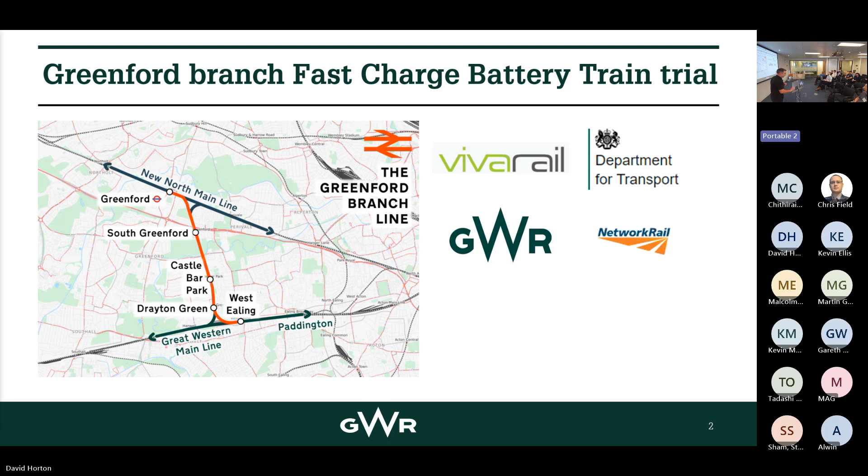The key ingredients to this whole trial are really the people, the train, and the charging system. I'm going to start with the people, because that really is the most important thing about the whole trial.

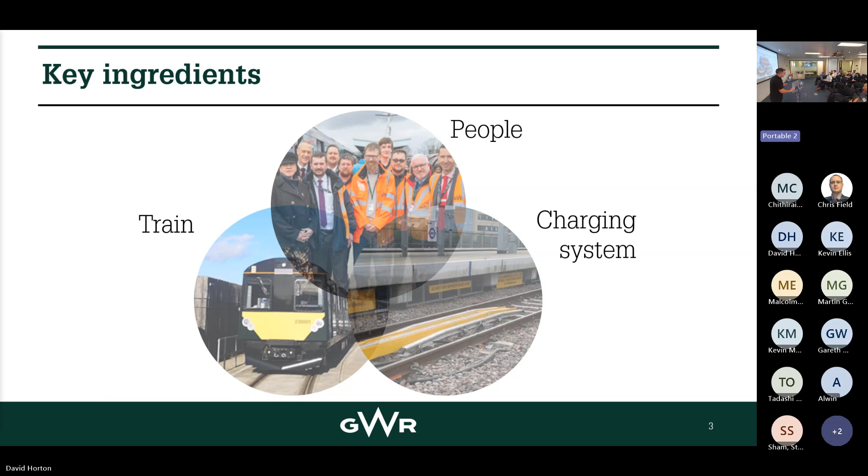I always like to start these presentations with a nod to this gentleman, Adrian Shooter, who sadly passed away around the same time Viva Rail went into administration, December 2022. Adrian is well remembered as one of the leading figures of privatisation. He took on Chiltern Railways, or the part of British Rail which became Chiltern Railways, and totally transformed it with route modernisation, new trains, new signalling, higher line speed, line reopenings, and double tracking where there was previously single tracking.

As engineers, have a good read of those two books there, because they're fascinating and inspiring. One is Adrian's biography, and the other is specifically about Chiltern Railways.

Anyway, Adrian retired from all that, but didn't retire for very long, and decided that he wanted to do something a bit different. At the time, there was a gap in the market for diesel trains, and he saw an opportunity which no one else did, which was to take old underground trains and repurpose them as diesel electric multiple units.

So the train you see there, standing just behind Adrian, is one of the old District Line D78 trains, which have now been replaced by the S-Stock. They were otherwise going for scrap, but they weren't too bad actually. They were aluminium bodied, had an interior refresh about 5 or 6 years previously, and new bogies about 15 years before that. So actually, they weren't really ready for the scrapyard. It's just they happened to be going that way because LUL wanted to standardise rolling stock.

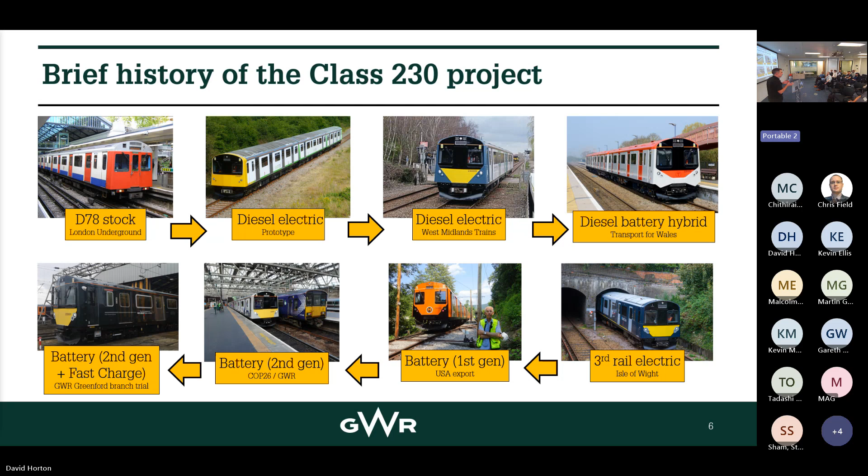And then finally, we took the original 230001 diesel unit and turned it into a battery train. We took it to the COP26 climate change conference in November 2021, and ran it as a demonstrator for 2 weeks in and out of Glasgow Central, carrying invited guests. And then finally, that's the train that became the fast charge unit that we have today.

Just to say a little bit about what's gone on in the last few years. Viva went bust, and we had to get rid of a lot of stuff. It's not just been about this trial - we had an awful lot of assets to get rid of.

We had a factory to clear out, so me and my little team weren't just doing the trial, we were also clearing out the factory at the same time. Many dusty hours of sorting, and unfortunately an awful lot went in the skip. But that's almost a separate story.

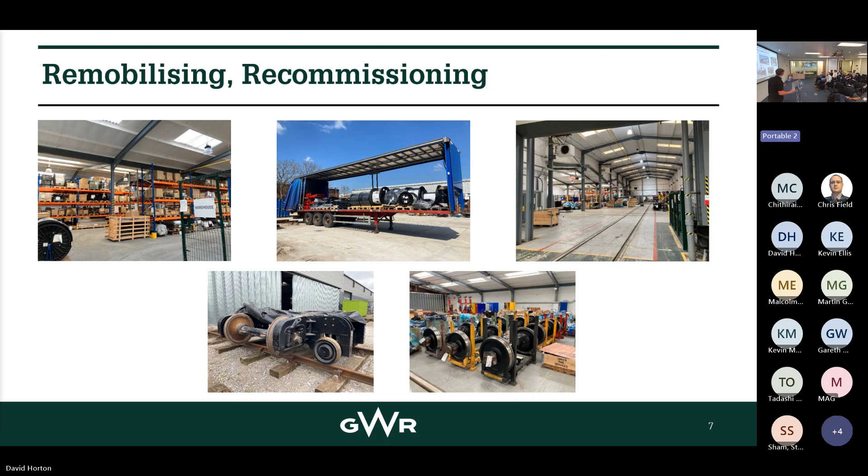That all started in February 2023. Great Western took us on, and we remobilised the team, got ourselves a new office in Leamington Spa, and got rid of the factory stuff. By about June that was clear, so we could then focus on the train.

Here's the train. We had to find somewhere to actually recommission it, because it had been stood for about 5 or 6 months whilst the administration was going on. It was at Bletchley Depot when that happened, and West Midlands Trains were redeveloping that depot, so they wanted us out. So we had to find a new home to recommission the train.

Slightly ironically, we ended up back at Long Marston, which is where Viva Rail started in the first place, by which point Porterbrook had purchased Long Marston and the horrible old shed there. It was a rough old facility when Viva Rail were there, but Porterbrook have invested about £10 million in it now, and it looks absolutely wonderful - it's got three roads of pits, proper lighting, proper everything.

So we were able to take the train back there and recommission it. We recommissioned every system because we didn't want to take a chance - we didn't want to assume it was still okay. We wanted to recommission everything, so we did that.

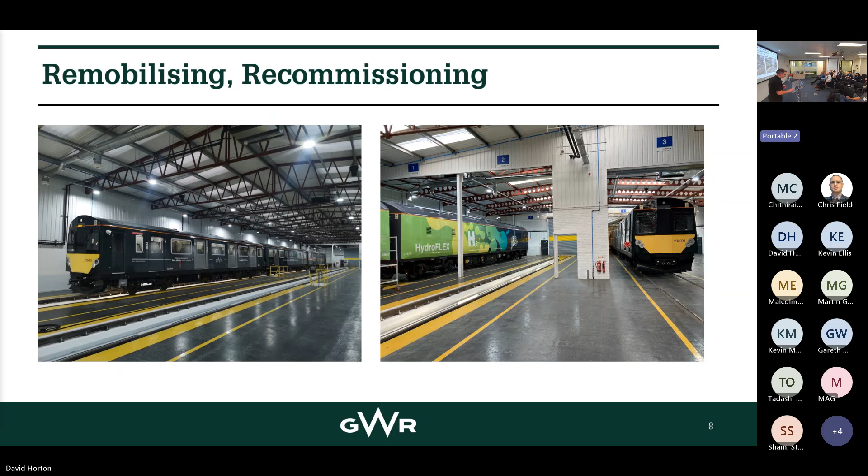So we had to basically gut it and start again in order to turn it back into battery units. We totally rewired it, rebuilt the cab, refitted it, and in amongst that we had to make some changes. Obviously, to make it into a battery train, we took some of the architecture that was there before in its diesel form, but had to change certain things.

One of the challenges Adrian gave us was, I don't want just 2 of these things, I want 3 batteries. He wanted to absolutely stuff the underframe full of batteries. So we had to find space for the 3rd battery, which meant rearranging some of the other furniture - we had to relocate the main reservoir, and I don't know what else at the time, but we only just managed to fit it in, as you can see.

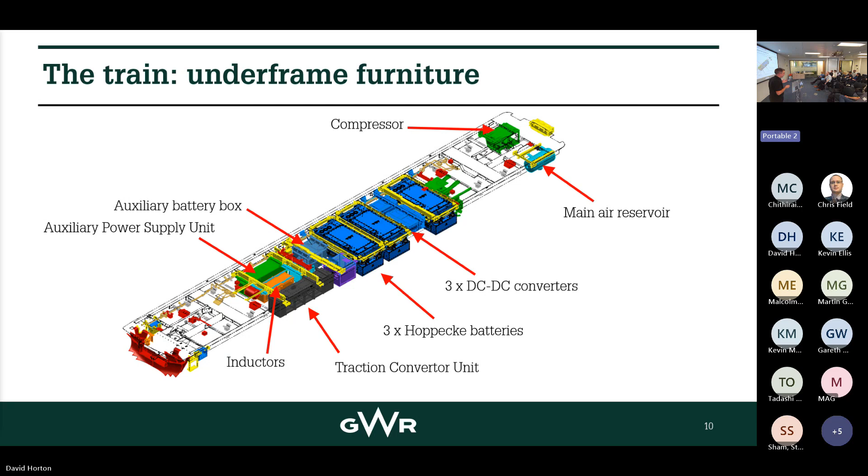So we designed all of that, and amongst not just the moving of the big lumps of furniture, there's an awful lot of finding space for the cables when you're doing batteries and charging. You're talking about pretty thick cables, so actually finding a home for them and finding a route for them was also a bit of a challenge.

This is the diagram of where the cables go. Imagine that's the plan view of the underframe. You've got 3 distinctive yellow rectangles representing the batteries, and the purple lines are where all the cables go. You take power from the batteries to the traction convertor unit, which is the brains of the train, and cables from the pickup shoes for the fast charge system to the battery. In the end, we had to cut some of the floor out, put the cables underneath, and lay the floor back on top, so the floor actually supports the cables, as well as being a fire barrier and a floor. It performs 3 functions, and you can see some of the cross section of that below if you like this sort of detail.

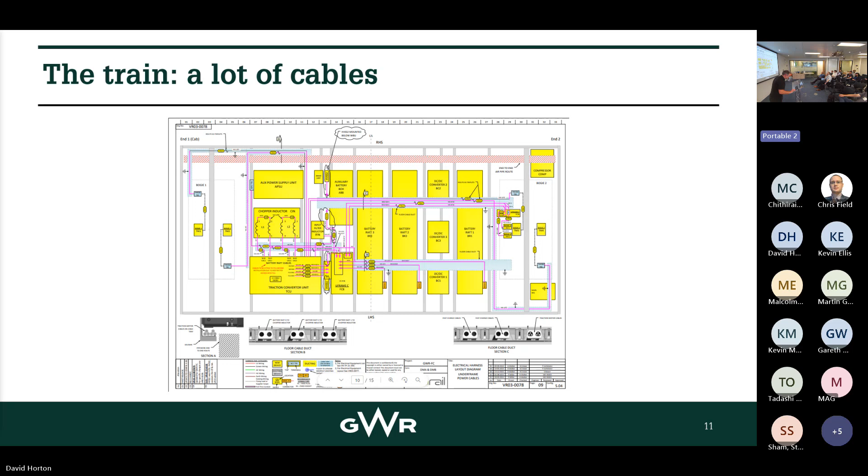What we ended up with in terms of mass is a 96-ton train, which is about 8 tons more than the equivalent diesel units. So yeah, battery trains are heavier, not surprising there. And you've got a capacity of about 37 tons of passengers, which leads to 133 tons if you really crush loaded it, which on the Greenford branch you're not going to do, but that's the plated weight of the train.

We've also fitted - the old LUL trains used to have a door between the carriages. Now they've got a little gangway. It's not a wide gangway like you see on the Elizabeth line, but it's a walk-through gangway, so that's a nice feature. It's also got draft screens, and it could have luggage racks if you want them as well. So there's all kinds of stuff.

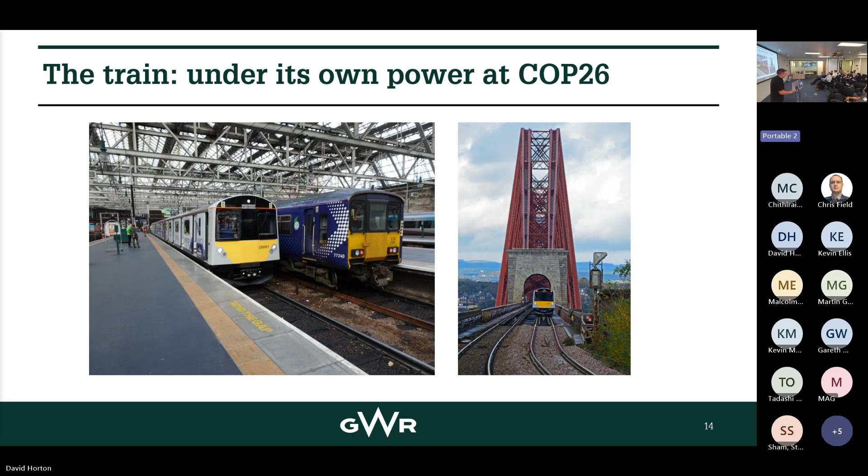So that was fun. So onto the fast charge system, which is what you've all come to hear about. Obviously with the battery train, the problem is your range is limited. The average diesel train will go 1,000 miles between refueling, and you just can't do that with a battery train. So you have to find a way of charging it. There's no way you're going to get a driver to get out and plug it in for 20 minutes - that's not going to happen, not practical in a railway environment. And there's no way you're going to change the batteries either with some sort of mechanical handling, as someone suggested to me once. Not 1.7 tons, no.

So the system that was devised - and I don't actually know who in Vivarail invented it, the opinion is out, it wasn't Adrian, it was one of the other electrical engineers, there's a bit of historical competition about who was actually the inventor of the system - but what we've ended up with is a system that automatically charges the train. All the driver has to do is stop it in the right place. And we're not talking millimeter tolerance, we're talking about half meter tolerance, average stopping tolerance at a station.

And the way it works is like this. The kind of power you need to charge the batteries is quite enormous, and you can't just connect to the national grid, because there just isn't the capacity to do that. So you have to have an energy buffer between the train and the national grid, and that's where what we call the fast charge battery bank comes in.

The big thing you see in the middle is essentially a 20-foot shipping container, which has got some batteries in it and some power electronics, and it trickle charges from the grid when there's no train around. When the train comes in, it connects with the battery bank via some rails in the four-foot, which I'll show you in a minute.

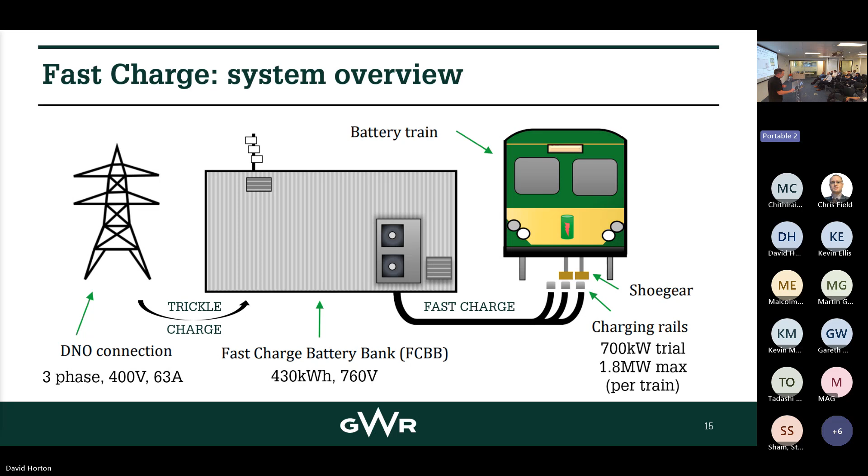So that's the basics of the system. Here's a little graphic of what it actually looks like, step by step. In the four-foot, you have the charging rails, and you've also got some RFID tags, which are RFID beacons. If you're familiar with ETCS and that system for signaling, it's exactly the same beacons, just programmed with a different code. So they're off-the-shelf beacon technology, and you have 3 of those beacons.

One is what we call the station confirmation beacon. Hopefully this will work if I press - a little train will come along. There it comes. So the first beacon says station coming up, and that's what arms the system. The second beacon tells the train to lower the charging shoes. And then once the train has stopped, the third beacon says, I'm in the right place, and charging commences.

Now, there's also another layer of interlocking. There's actually some proximity sensors which pick up on the bogie frame once it stops in the right place, so it doesn't just rely on those beacons. It's got Wi-Fi communication between the train and the battery banks, and it's also got proximity sensors as a final check to make sure it's in the right place. What this means is, if any of those things don't pick up properly, then charging just doesn't happen.

So, as we're now finding - well, no, that's probably unfair - it is actually proving to be quite a reliable system, but it is a little bit sensitive to comms dropping out, or a proximity sensor being knocked over or something like that. But I suppose that's the way it should be, because we wanted to make sure that we don't try and charge the wrong train at the wrong time.

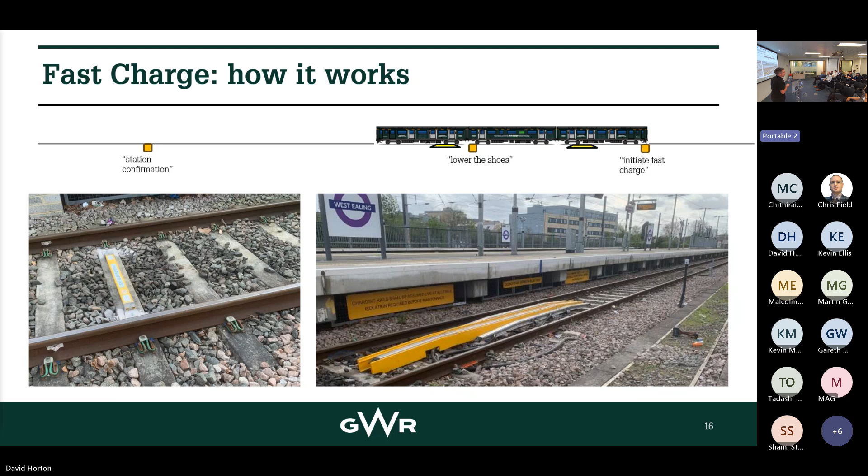You would end up with the negative shoe going from one side to the other, if you think about the geometry of it. At West Ealing, you've got 2 sets of rails and 2 fast charge battery banks, each one serving a driving motor car. So you've got 2 driving motor cars, 2 sets of charge rails, and 2 fast charge battery banks, which gives redundancy. Actually today we were charging the train with only one end working because we've got a problem with the fast charge battery bank. But that's great because it means you can still carry on — you just don't charge as fast, but you can still do a full day of service on that basis.

Right, I'm going to try and talk about power flows now, even though I'm a mechanical engineer, not electrical, but I'll give it my best shot. This diagram explains the elements of the entire system in block form.

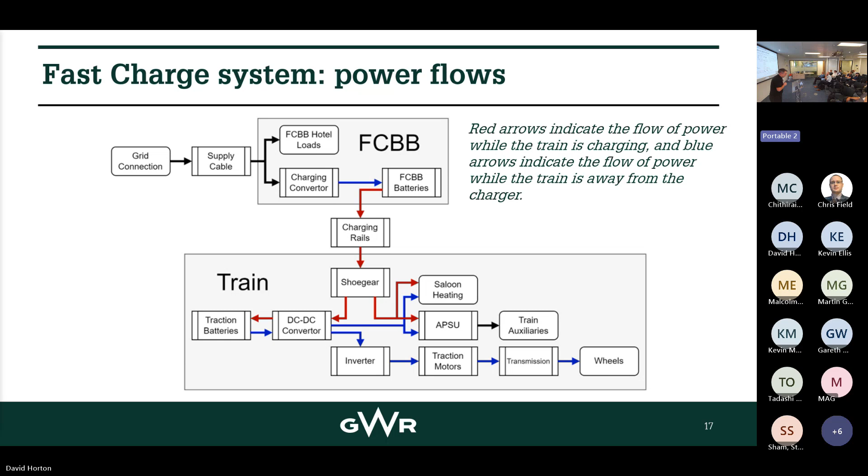So you have the grid connection via a cable going into the fast charge battery bank, FCBB. The FCBB has its own hotel load, so it's got its own air conditioning unit to keep the batteries at a stable temperature. The main power flow is into the batteries themselves in the fast charge battery bank. Then you've got cable coming out of the fast charge battery bank going to the charge rails in the four-foot, and then you've got everything on the train. The train has got the shoe gear, which feeds directly into the traction batteries and also into the auxiliary power supply unit, and it also feeds the saloon heating as well. I won't go into too much more of this, but it's sort of standard power architecture for a modern train, really.

Now the batteries, which is what everyone's always interested in. For a long time we were telling people, oh yes, it's lithium iron phosphate batteries, and not long ago someone said, well, how does that compare to lithium titanate? And we said, well, I don't really know. They've all got pros and cons, and what you typically find when you look into it is what you're trying to consider is 6 things: specific energy and specific power, i.e. how much energy and power you can get per unit mass in your battery, but also how safe the chemistry is, how it performs — so that might be how fast you can charge or discharge it, how long it's going to last, its lifespan, and how much it costs.

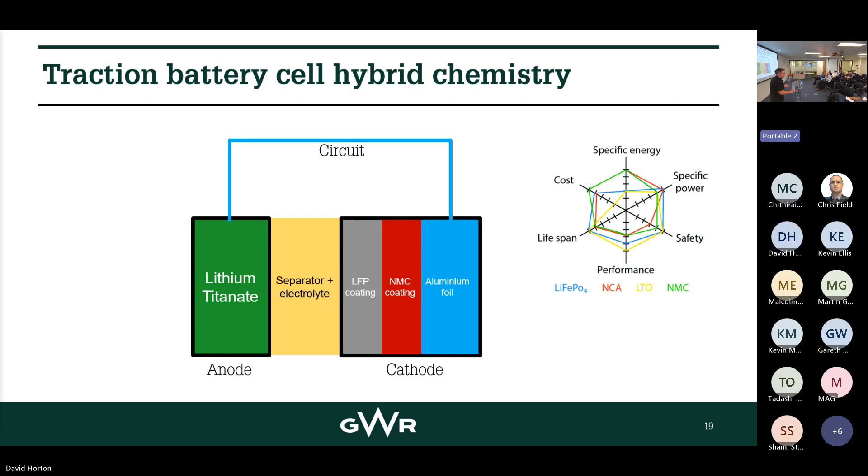To us, it's kind of just been a black box up until now. You buy the battery, you know how to treat it, you homologate it, but actually the detail of what's going on inside, we hadn't really got into. But that was an interesting finding. So now we know a bit more about our battery chemistry. Suffice to say, lithium phosphate and lithium titanate are supposed to be some of the safest battery chemistries out there, which is why they've ended up being used on trains and in EVs.

These are very actively managed batteries, as opposed to the average e-scooter, which doesn't have any of this. Each battery raft has its own little HVAC unit to keep the temperature in check. You monitor individual cell voltages, individual cell temperatures, and the balance of the cell voltages. Each battery has its own battery management system, and that all feeds back to the main train computer, the TCU.

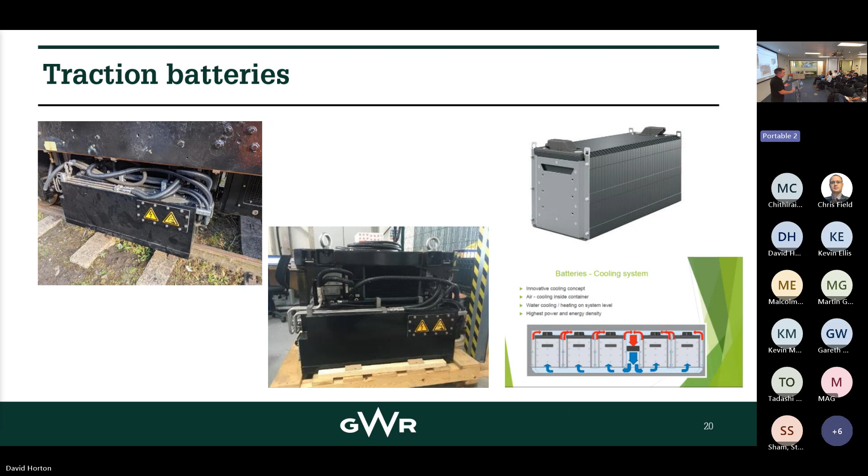It all forms part of the safety case as well. With lithium-ion or lithium titanate batteries, there's no real chance of putting out thermal runaway if you get it. So you put all your efforts into stopping it happening in the first place.

There are basically seven things that can lead to thermal runaway of batteries, illustrated on the left of the image here, and these are the things you're trying to prevent: external heating, being close to someone else's fire, overcharging, over discharging, charging at too high a current, structural damage - someone could crush it, or it could be a bullet penetrating it, which is tested for separately - and finally short circuits. All the efforts go into stopping that from happening in the first place.

That can either be through the battery management system or through actual mechanical design. These have got a pretty heavy-duty frame around them, so if they did fall off the train and hit the track, they'd be pretty resistant and wouldn't get very damaged, I'd have thought. They've got internal firewalls, and if all of that fails, you've then got downstream mitigations against the effects of thermal runaway, like treating the fumes that arise. It's actually got a fume box in it with some clever chemicals supposed to take away the worst of any fumes that might arise.

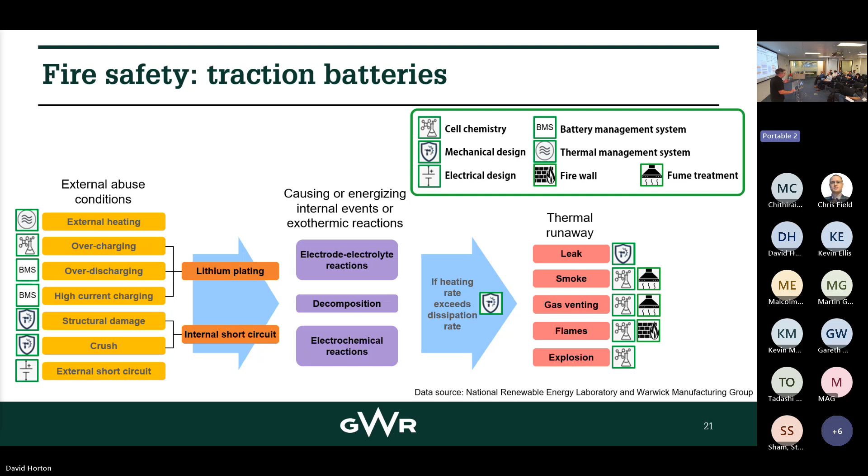As you can imagine, it took quite a while to convince the safety authorities to put this on a train. VivaRail weren't the first to put lithium-ion batteries on a train - I think that went back to about 2013 when Bombardier converted a Class 379 and put some batteries on it. But we were, I think, probably the first company to put this amount of batteries on one train. So every step along the way involved very careful scrutiny of all the changes we made.

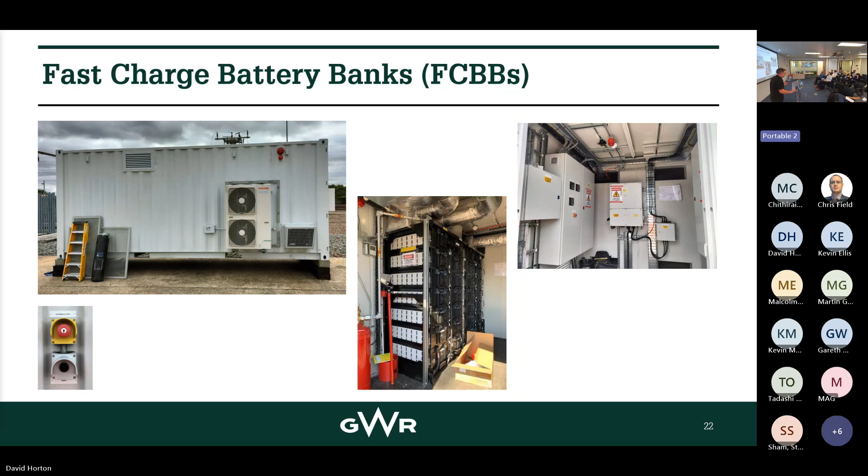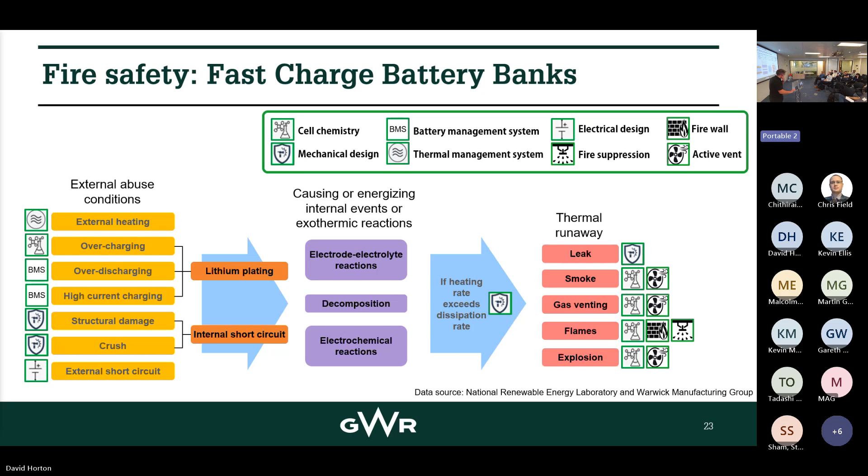It's a similar story for the fast charge battery banks, although you could argue the risk isn't so severe for these because they sit trackside, and if they did catch fire it wouldn't affect as many people as it would on a train. But again, they have very active management of the batteries, and in addition, they actually have their own fire suppression system in the containers. So as you can see, we've done just about everything possible to prevent anything bad happening.

Anyway, back to the more fun stuff. This is the development of the shoe gear, and this had never really been done before. Obviously there is shoe gear on trains, and we were very conscious of certain things when it comes to designing shoe gear.

The first thing is, if you're designing shoe gear for a train, normally it's mounted to a bogie, which is a horrible vibration environment. I've got some personal experience of that, because I was a bogie engineer at Bombardier for a while, and there were terrible problems designing shoe gear because of the vibration environment. So what I decided was our shoe gear would be mounted on the body, so it was in what they call the secondary sprung environment - the same vibration environment the passengers feel, which is two stages separated from the track, with primary suspension and secondary suspension.

That also means the design of the shoe gear is adaptable for other types of rolling stock. It's much easier to mount it onto another car body than it would be if it was a bogie-specific design, if you see what I mean.

The only thing you have to watch with that is the movement of the shoe gear on curves. If you've got overthrow, when the carriage goes around a curve, and you put the shoe gear in the middle of the car, you get the worst overthrow, and you might end up with the shoes not on the rails. So we put the shoe gear near the bogie pivot centres so that it suffers less of that.

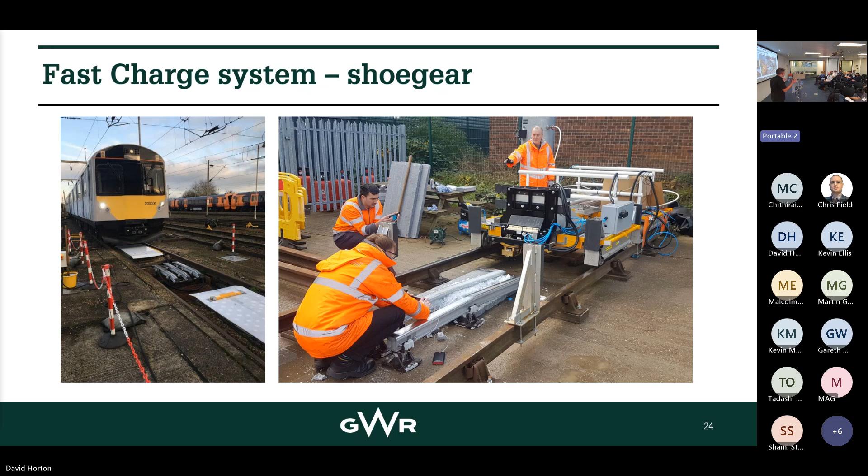One of the big considerations is what happens if you get ice on the rails, or leaves, or oil on the rails. So one day we actually created ice using ice from the supermarket — I think we used nitrogen or something, super cooled it, and packed it around the rails. Then it snowed the night before, so that's where this video comes from.

So you can see, hopefully this will start in a minute — here come the shoes, they come down, run up the rails, pushing the snow out of the way. To be fair, that is nice soft snow. Then it retracts, and it did that for 20,000 cycles, which represented a year of usage.

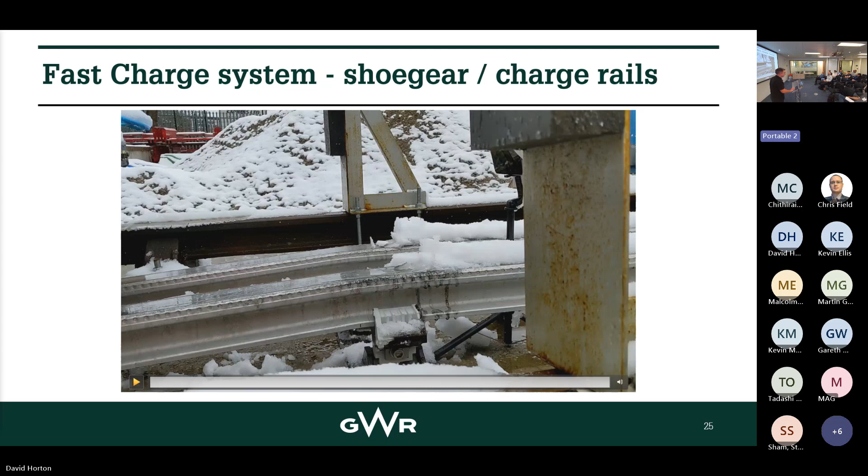But obviously now with the real train in situ at West Ealing, we're testing the real thing. And strangely enough, the other day we noticed the diesel train was putting oil all over the rails, dripping oil all over the rails, and it didn't have any effect on the charging whatsoever, which was nice.

This is a video of it when we were at Bletchley Depot. What you see is some short charge rails. Those aren't representative of the full length of the real thing. What I'm going to show you is the trackside view of what happens.

The white sheet there was just to protect the shoes, because in this particular location we had some concrete, and if the shoes had hit the concrete, they would have damaged themselves. So we had this skid pan arrangement to protect the shoes as they came down. But at West Ealing, you've just got ballast instead of concrete in the middle, so the shoes don't come into contact with anything.

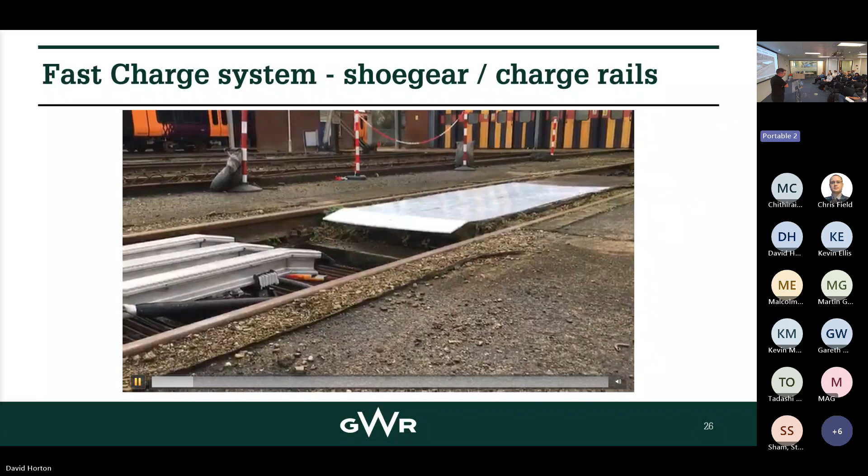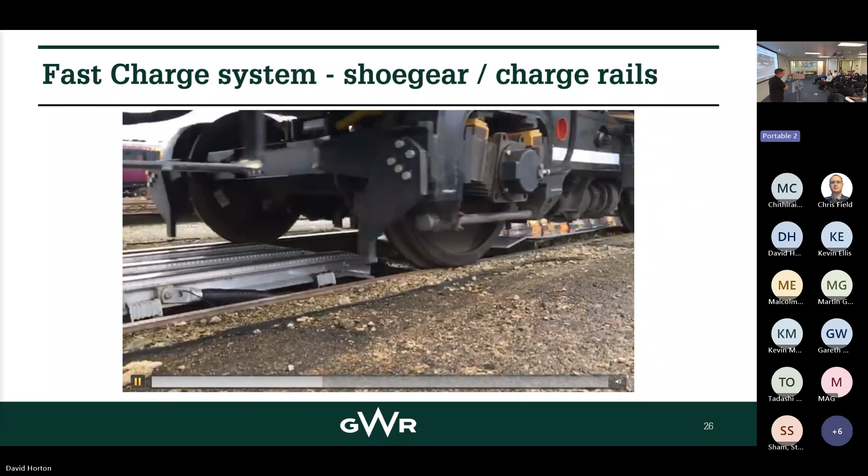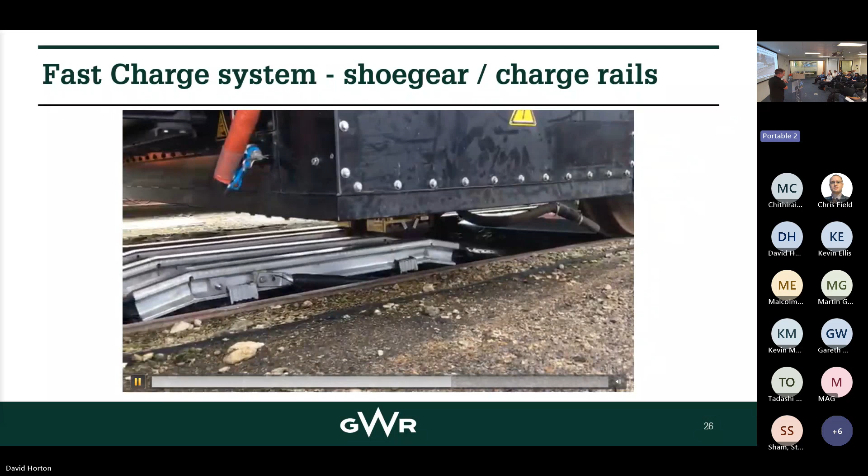I'll just play this video - it's not that exciting, but the train comes along. Obviously the driver has to slow down to a reasonably slow speed for all this to happen. So the first leading bogie passes over. We kept the shoe gear away from the leading bogie because that's where all the antennas are, so we wanted to separate them. There they go - you just see them come down, like Wallace and Gromit, then up the rails, and then it stops. That's all you see.

It's quite unexciting really. Once the charging is finished, as soon as the driver puts the power brake controller into power step 1, the shoes automatically retract within about half a second, the brakes come off, and off you go. So all the driver has to do is stop it in the right place, put it into neutral, make sure the brakes are on, and it all happens automatically.

The only indication the driver gets that anything's happening is a single yellow light in the cab, which indicates that charging is happening. You can also see charging is happening if you step out of the train and look at the body side indicators - they flash white, which again indicates charging is happening.

We were quite deliberate about not telling the driver what the state of charge was, because at the moment the driver doesn't know how much diesel they've got, so why should they know how much battery? The problem with telling them how much battery they've got is they start to worry about it, and then you get 'I can't go, I can't do the trip, I'll have to take the train out of service.' So there's a bit of debate about what information to give - obviously we monitor the state of charge remotely, there's a remote monitoring system with alarms if it gets too low. But the driver, we don't tell them very much, rightly or wrongly.

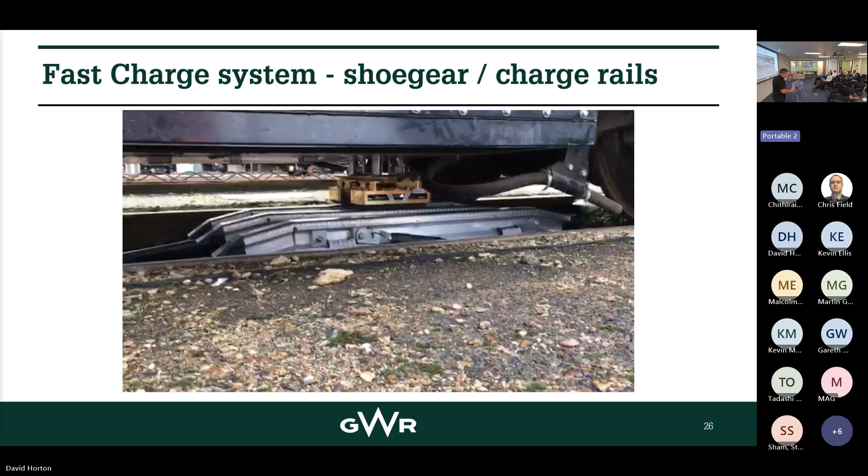But actually that's gone down all right with most drivers, so I've shown you that.

I probably won't say much about this. I'm not going to go into detail, but suffice to say, the approval of all this was hard work for all the right reasons, because we are dealing with high voltage and batteries and a new system. Fundamentally we were working under the common safety method, and the first step is to define the change - put a boundary around what you're actually changing in the railway environment, and then decide whether it's a significant change or not. Because this was the first time this charging system had ever been used in the railway, it was deemed to be significant change, which brings in the need for a third-party assessment body.

Some of this, in light green, is all the stuff we had to do for the assessment body. So you have a big hazard identification session - we had several of them - and then you have a safety justification report, hazard record, and a load of safety requirements that come out of that. You then have to close out the safety requirements either through design or other mitigations.

Once you've done all of that, you get your safety justification report, you give it to the assessment body, ASBO, and they assess it, ask lots of questions. You then go back, answer questions, make design changes, whatever it is.

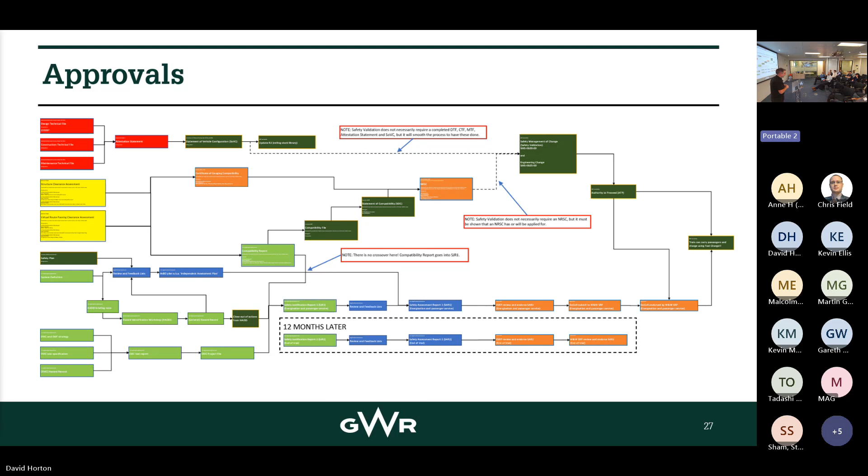But we got it approved, and it's now essentially usable in an unrestricted fashion. It was several stages towards that, and Network Rail have been involved all the way through. So it was very much a partnership, and we denigrate them, but actually they've been pretty good. But it has been a bit of a tough journey.

Back to more interesting things.

The other question I talked about earlier, battery trains have only got a finite range. So we've got our charging system, but then you have to consider, well, how far will it actually go? Not just under normal conditions where everything's working fine, but under perturbed scenarios where, for example, one of the two trackside battery banks has stopped working, or maybe a couple of batteries on the train are no longer responding or something like that. So you have to consider the effect of that.

Now, we were lucky to have an undergraduate come to work for us in VivaRail days for a year-long placement. He was given the task of developing a model of how this system works. Being young and bright, he took it on and came up with this wonderful model in Python, a coding language which I don't understand. But anyway, he ran with that, and then he went back to university, and we got another one called Jonathan, and he refined the model, improved it, expanded it, all the rest of it.

So we now have this wonderful model which we call the Battery Train Network Simulator, BTNS. You can almost, if you can imagine it, click and drag various elements into it. So you've got a traction motor with its characteristics, you click that into the model. You've got a battery with some characteristics, you click that in, and you gradually build up the overall model with all these little elements. Of course, the characteristics of each element is based on data sheets or real-life testing or whatever it is. So you can build up this model of the train, which is what these blocks represent here.

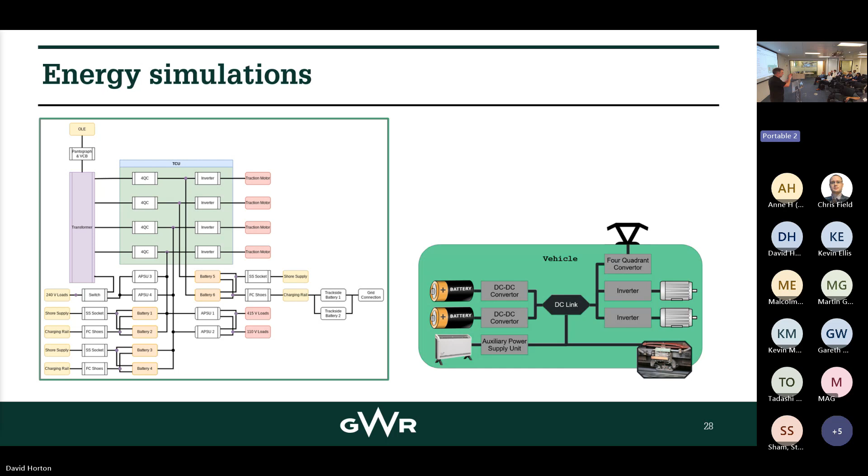But you can also build up a model, equally as importantly, of the route that you're running the train on. So you need to know things like gradients, number of stations, speed limits, driving styles, and all of that. All of that has an effect on the overall energy consumption of the train.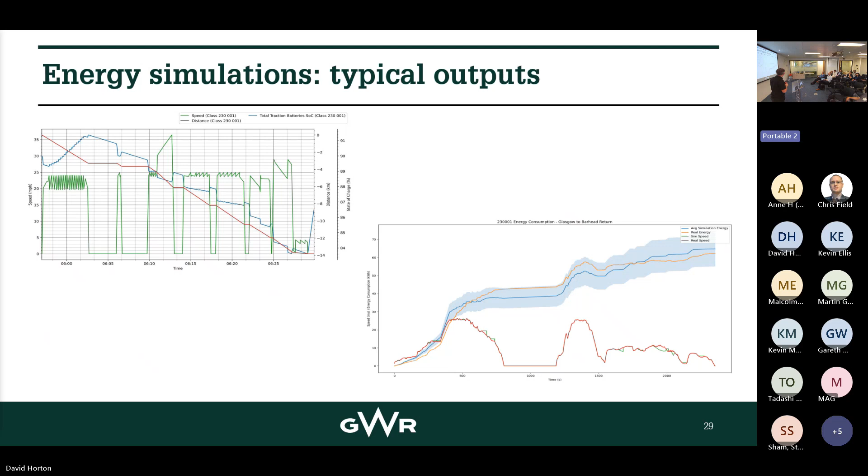This is actually a real plot of what the batteries do. At the moment we're running the train on the Greenford branch Tuesdays, Wednesdays, Thursdays, just to give us enough time to set that up for the week and then analyse the data at the end of the week.

Unfortunately, we can't run the train like the normal diesel train, which does 31 round trips a day, 6 days a week, because there's not enough paths on the line to do that while the diesel train is there. So if we want to do a full 31 round trips a day, we have to do it on a Sunday. We did that for the first time in June, Sunday 30th of June, and that's what the graph looked like of battery state of charge.

The sawtooth represents, when it goes down, that's energy being used when running between West Ealing and Greenford and back, and when it goes up again, that's where it's being charged. You can see it's a pretty uniform profile all the way through the day, except around 6 o'clock in the evening, when it didn't quite get a full charge — there's only a half charge you can just about see — and the overall state of charge ended up a bit lower, but actually it was fine. It made it through the day.

What we found in testing is that we can do about five round trips comfortably without charging, six at a push, but by the sixth one we're getting a bit nervous and want to take it back to depot. So that shows you there's some resilience in the system, if something goes wrong.

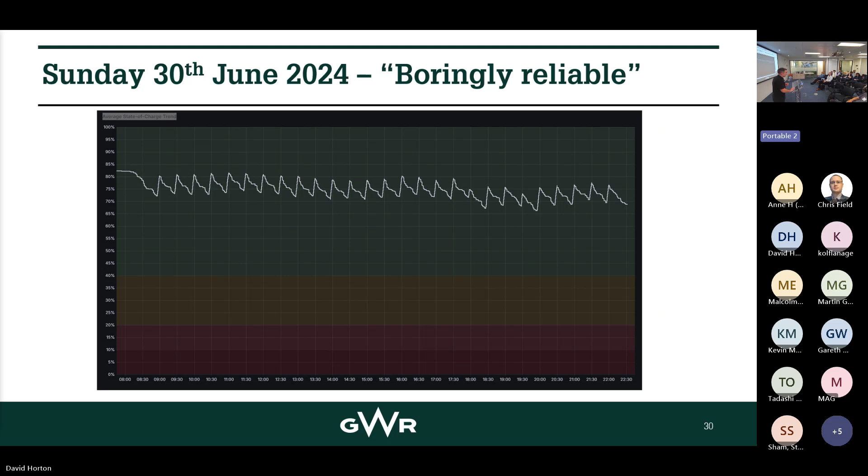We're hoping to build up gradually now. We started driver training with Great Western drivers, and we're hoping to get this into passenger service early in the new year, 2025. That will be the real proof of the pudding, because it's okay doing it Tuesday, Wednesday, Thursday with 6 round trips a day, but doing 31 round trips 6 days a week is a different game really. It'll be interesting to see how reliable the overall system is.

These are the Thames Valley branch lines, run by Great Western. One reason DFT and Great Western picked the Greenford line is exactly because they've got other similar branch lines on their patch. So one day in future, hopefully we might roll this out to the other branch lines, subject to DFT deciding what to do.

For the Greenford branch, it's about an 8 kilometre round trip. It uses about 40 kilowatt hours, which represents about 9% of the overall capacity of the batteries on the train. Hence you can get 4 or 5 round trips comfortably. At West Ealing, where it charges, it takes about 4 minutes to replenish the energy used in the last round trip.

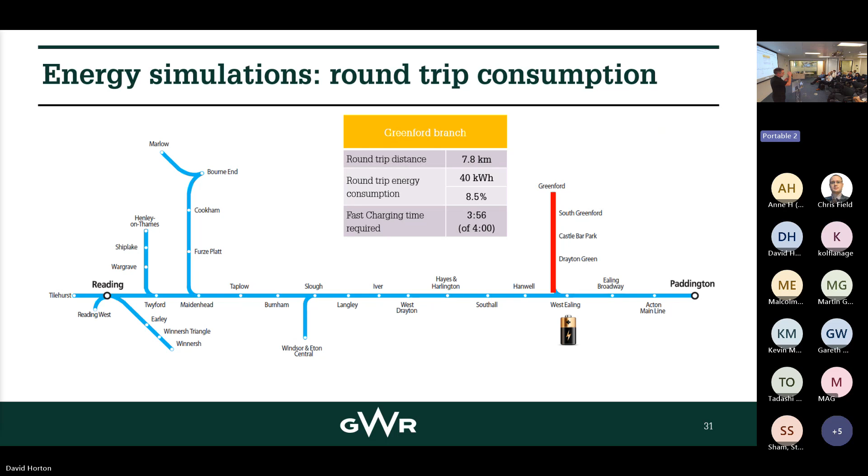So we are charging every round trip, not because we need to, but because it's basically opportunity charging. You charge it when it's available, and that also stops you discharging the batteries too far, which is good for the health of the battery.

Sometimes you have to take the train back to Reading, where it's essentially maintained every 18,000 miles. That's obviously a bit of a longer journey, about 50 kilometres, so it wouldn't really get there and back on one charge. So we've got some plug-in chargers at Reading, so that when it gets there, does its maintenance, plug-in charge overnight, and then send it back to West Ealing.

The train is normally stabled at West Ealing. There's some sidings there as well, where it's got plug-in chargers. So we just plug it in overnight so that it comes out the depot fully charged the next day, hopefully. That's just how we manage it.

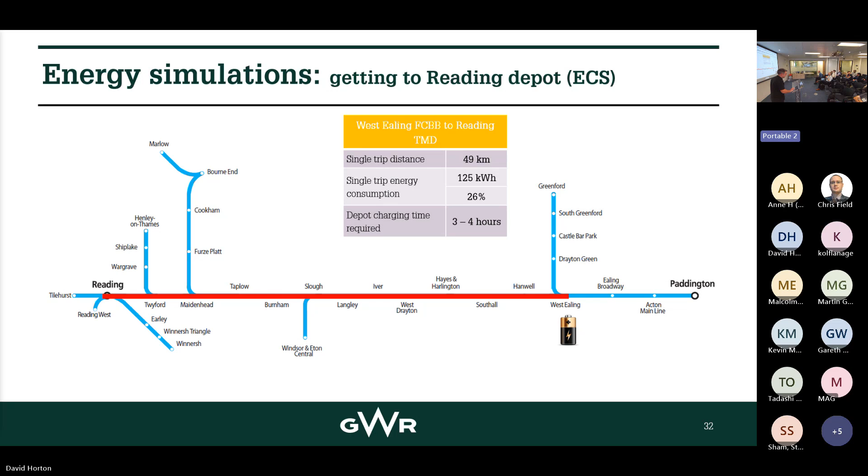And we have the longest we've done with the battery train - the furthest we've travelled on one charge. I think it was 86 miles, because we brought it down from Long Marston in Warwickshire, down the Cotswold line, through Oxford to Reading, and I think that worked out 86 miles. That made the press and everything, but it wasn't really representative of what the battery train is doing. Anyway, so it's got plenty of reserve in it, as you can see, and it depends how you treat it.

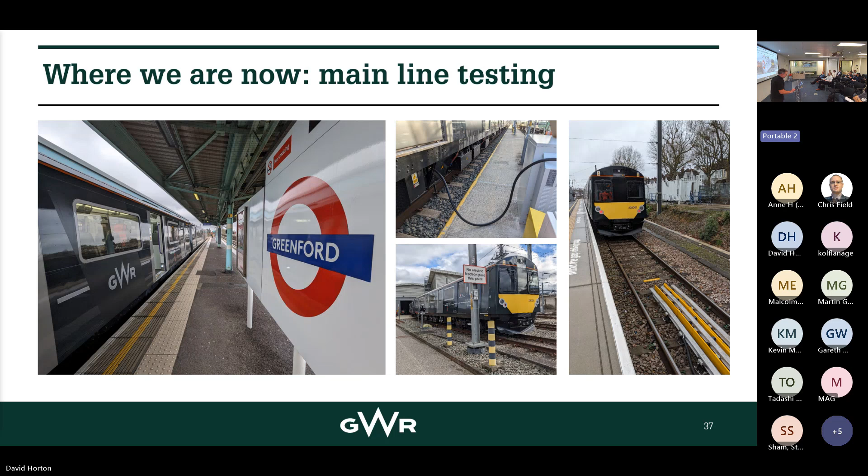Some more pictures there of various media days and all the rest of it. As I said, we're heading towards full passenger operation. Some might say we've taken a while to get there, but we didn't want to rush it. We didn't want to suddenly put something into service that turns out to be terribly unreliable, because we're very conscious it's an old train - although it's new technology, it's an old train, so we didn't want to push it too hard.

What we don't want is a bad reputation for battery technology because of things that have nothing to do with the batteries. The fast charging system could be fine, but if we have door faults, wheel flats, or whatever, we'll probably get a bad reputation—people will say it's a battery train, the batteries are rubbish. So we're very cautious of not getting a bad reputation for the wrong reasons.

So we're building up gradually. We're going to do more Sunday runs, Sunday full day testing, 31 round trips, and then eventually we're going to start carrying passengers, fingers crossed, in the new year.

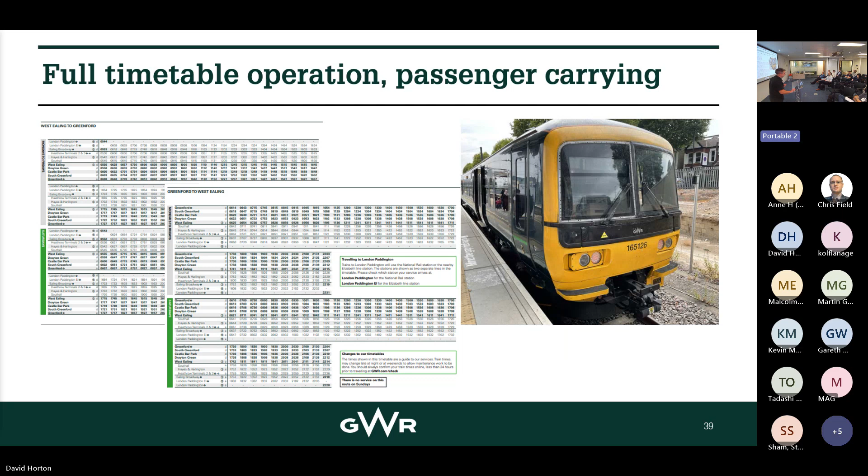In the meantime, we're testing it for all kinds of different things, as these images illustrate. We've tried to define tests that cover all conceivable eventualities of weather, service disruption, and component failure. For example, we're coming up to autumn, leaves, and we're just going to let the leaves fall on the rails and see what happens—no special maintenance regime to clear them out of the way.

We've already had oil contamination. We'll hopefully get a bit of snow, perhaps, plenty of rain. One of the things about rain is that if you get wet leaves building up under the rails, you get earth leakage. The system has earth leakage detection, such that if it was bad enough it would shut the system down. We've already seen that on a rainy day you start to see a bit of interference in the graphs for earth leakage—you just monitor that. But nothing untoward has happened yet.

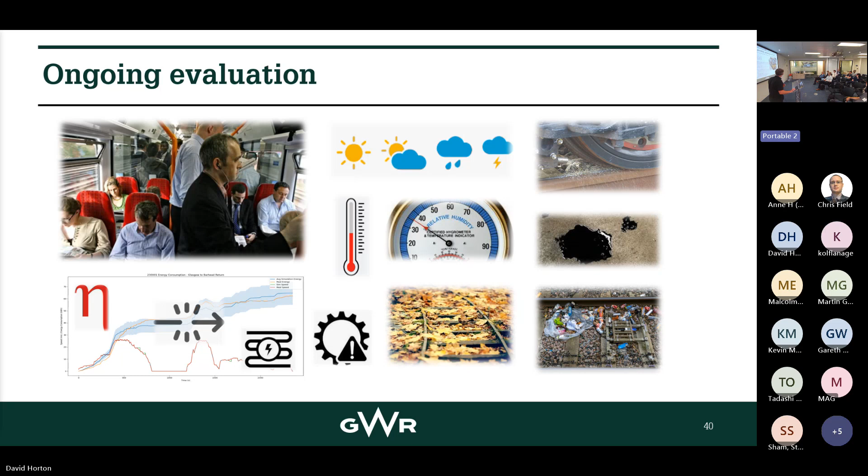We've had it running during the summer, so we've tested pretty hot days. This will be the first winter it's done in the actual location, other than the shoe gear testing I showed you earlier. So there's lots of testing we're doing alongside the driver training as well. A lot of that, or most of it really, is about reliability more than anything else. We've covered the safety points now, and we're into proving this is going to be a reliable system, which so far is looking good.

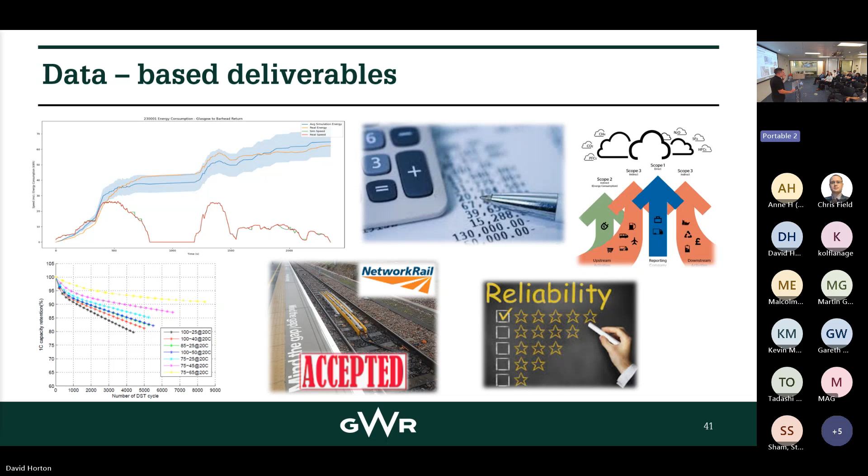The real difference comes in the infrastructure. Electrification is quite expensive, and hydrogen refueling infrastructure is also expensive, as is fast charge infrastructure—you need to pay for trackside battery banks, putting the charge rails in, and the DNO connection, which all comes to several million pounds. But the nice thing about installing fast charge is you can essentially do it in one or two shifts—we just take a line block, I think twice, to put the charge rails down. Whereas if you're electrifying, you have to close the line for months, immunize all your signals, put your pylons and stanchions in, and all the rest of it.

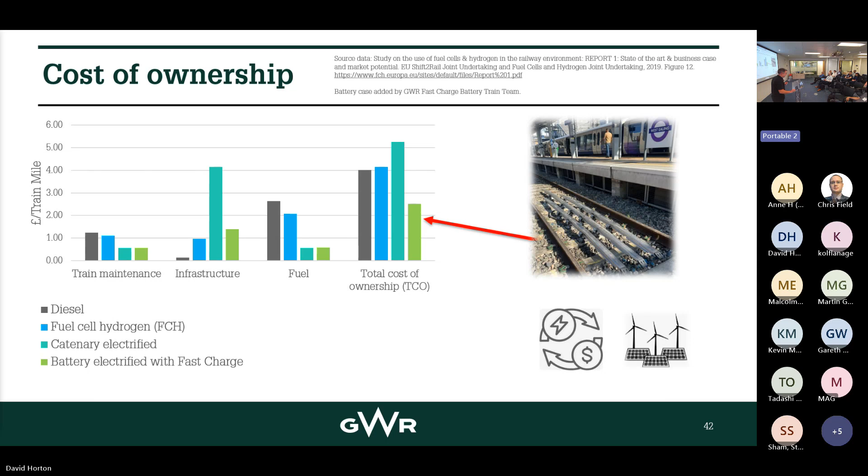We've also done some work on the embedded, or embodied, carbon of making a battery train. To do this, we looked at the 230 as a 3-car battery train. We looked at all the material that went into converting it, by mass essentially, and used various online tools to get the average embedded carbon per type of material. There's also the carbon emitted from running a factory—gas heating, electricity consumption, and so on. We even included the vans and cars that VivaRail had in the calculation.

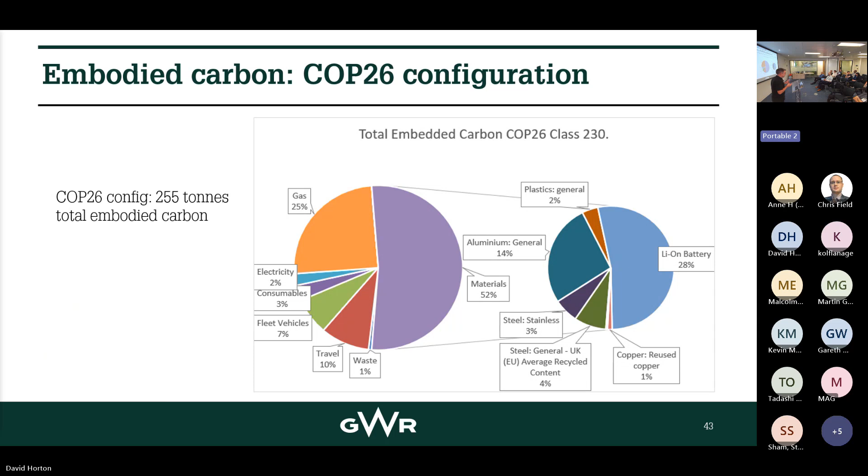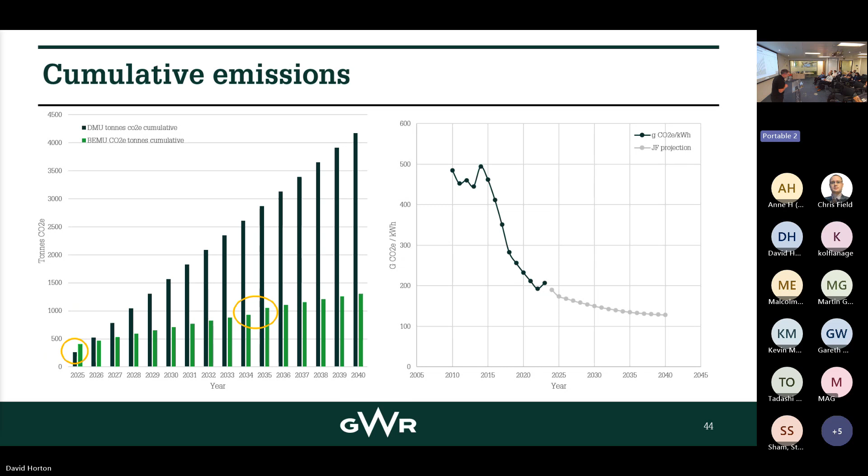We worked out, this was two years ago, that there was probably about 255 tons of carbon that went into making that battery train, which might sound like a lot. But when you look at the payback—putting your battery train in and taking your diesel train out—the payback is something like a couple of years, maybe even less. So ultimately, the carbon you emitted to make the train, you eventually get a saving from withdrawing the diesel train. That's just another reason to do this potentially.

And finally, we have studied the other branch lines on Great Western and worked out where we might put fast chargers. Whether that happens or not is not my decision, but it can be done, as you can see. There's also scope to do this on other slightly longer routes.

You could conceive of using this system on, say, the West Highland line or the Far North line. You might have charging at intermediate stations—you don't have to have it at a terminus, it can be done along the route. It's quite well suited to places where you haven't got ready access to overhead power lines, where you might have, say, the 11 kV network, which tends to be used in rural areas. You can just plug this into the 11 kV network. So if you've got a very rural station somewhere down in Cornwall, Wales, or Scotland, it would be ideal for that.

So in summary, it's been very interesting, and it continues to be interesting. Hopefully this will catch on—somebody will take it and run with it, whether that's Great Western or somebody else. Thank you very much.

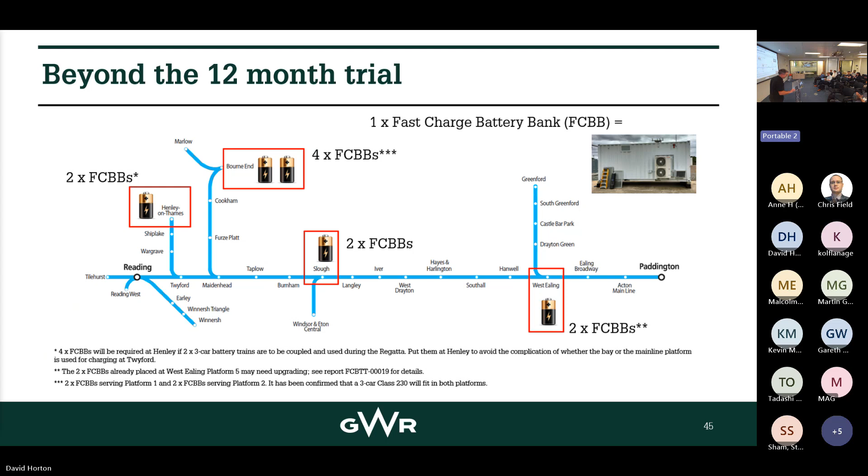Thank you very much, David. That was a really fantastic presentation, I really enjoyed it. Hopefully you don't mind if we have time for a bit of questions and answers. For the benefit of people online, we'll try and repeat the questions—is there anyone who would like to ask the first question? Chris, you've got your hand up first, so go for it.

When you showed the video of the shoes coming down, on most third-rail trains the shoes are above the rail level, so you never really worry about that, but clearly these go below rail level. Yes, they do—it's essentially so it can run up the ramp and push any contamination off the rail as it does so. I think the actual level of the middle rail is the same as the level of a normal fourth rail, but we wanted to make sure the shoe actually clears any contamination as it comes into land, sort of thing.

So if you were just coming in and deployed the shoe onto the contact, you might end up compressing any contamination into that patch. So we wanted to wipe it clean, basically. I guess the reason we drop below is just to make sure it has that contact pressure as it comes into land, as I call it.